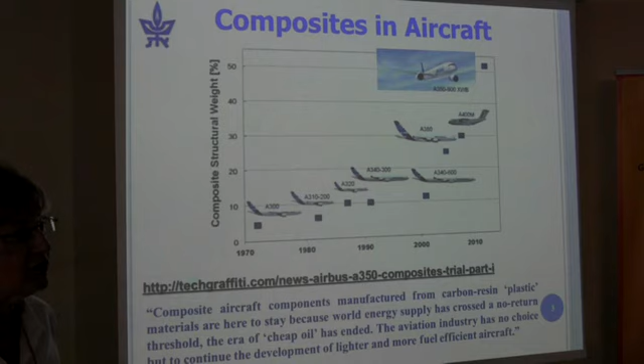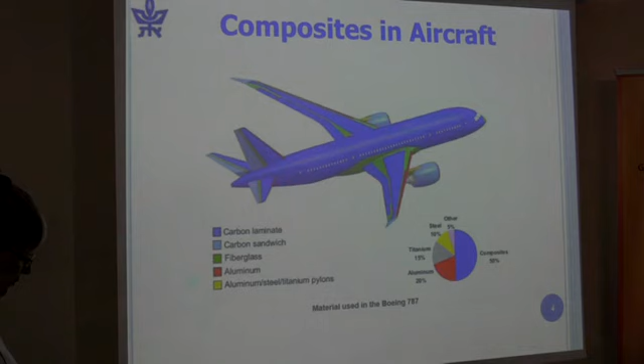Not to forget about Boeing — in many of their planes, and in particular the Dreamliner, the 787, they also have 50% by weight of composites. So we're stuck with composites, and we need to learn as much as we can about them. So we're going to talk about some of the problems in composites.

First, let me explain what a laminate is. We've heard talks about steel and aluminum, and maybe there are people here who don't know a lot about composites, so let me just try to explain it from the beginning. A composite material is composed of more than one component, one constituent. You can take a matrix, which is epoxy, and put in particles of different kinds of material.

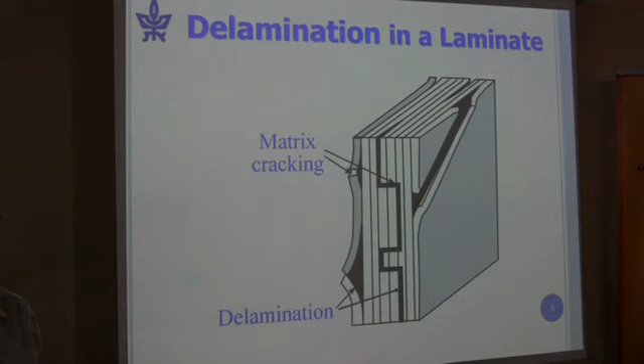Typically what happens is we have different failure modes, and the two most prevalent failure modes in laminate composites are matrix cracking — that is, the fibers, let's say, are not in the 0 degree direction, because that would be very strong — and we get cracking through the matrix, through the epoxy, for example. Or another mode of failure, which is what we're going to speak about, is delamination.

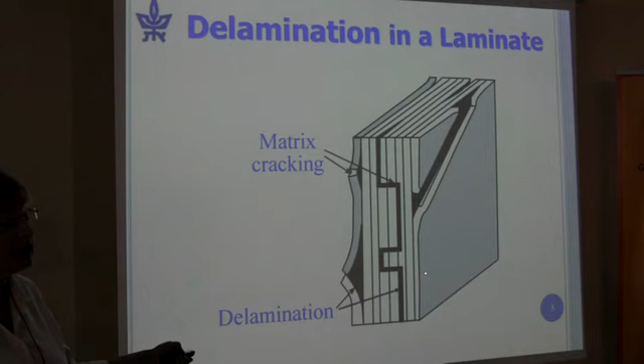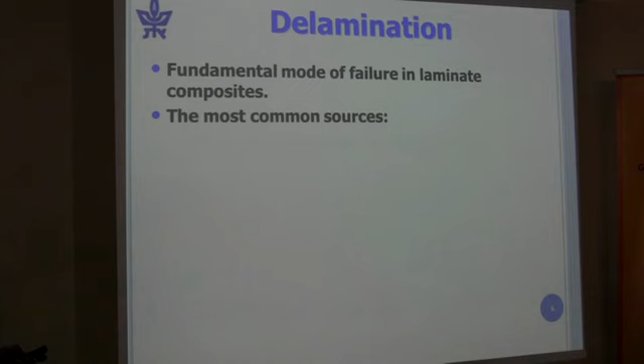We get a separation between the various layers, and that's a very prevalent mode of failure. It's a fundamental mode of failure, and the common sources are material and structural discontinuities, in-service loads, and in particular impact. A plane is flying along, moving along the ground, and a stone hits the wing and impacts it, causing separation of the layers. It's very common, unfortunately. So delaminations tend to occur between plies of different orientations.

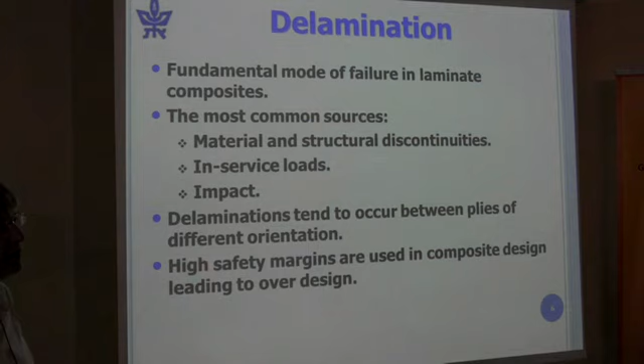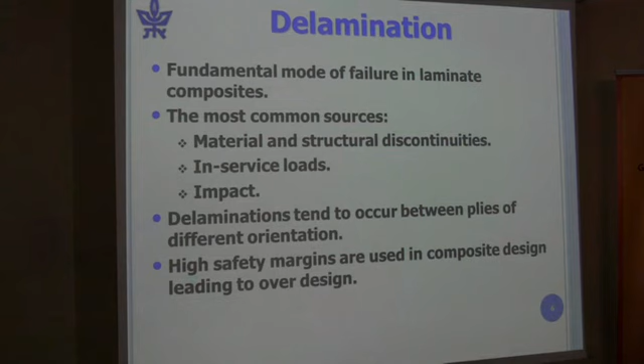What airplane companies do, because they don't use damage tolerance approaches like they do for metals, is use over-design with very high safety factors so they won't obtain failure. But this is a waste—a waste of material, a waste of weight, and it's not fuel efficient. So what we need is to give them accurate fracture toughness values so that we can bring down this over-design.

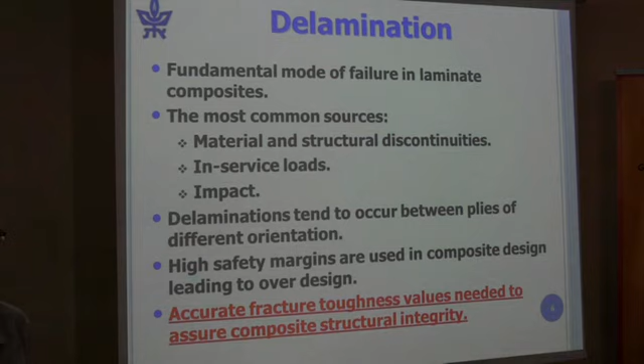One thing I haven't mentioned, which I won't talk about, is that we also need to understand the fatigue properties of these materials. But today I'm only going to talk about fracture toughness.

So to begin with, we'll talk about interface fracture and anisotropic materials. Some of you may wonder why I'm speaking about anisotropic materials—composite materials are anisotropic and inhomogeneous. But what we can do, and what is typically done, is use some sort of homogenization or micromechanical procedure, treating the material as if it's homogeneous, but anisotropic.

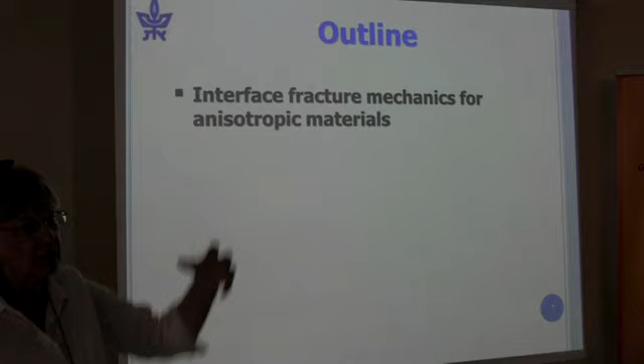So if we think about the ply, which has fibers in the 0 degree direction, it has a high Young's modulus in the direction of the fibers and a very low Young's modulus perpendicular to it. So it's anisotropic.

We're going to consider one interface. We've done more than this, but because of time limitations, we'll look at what's called the 0-90 interface, which I will explain. We carried out tests on Brazilian disc specimens.

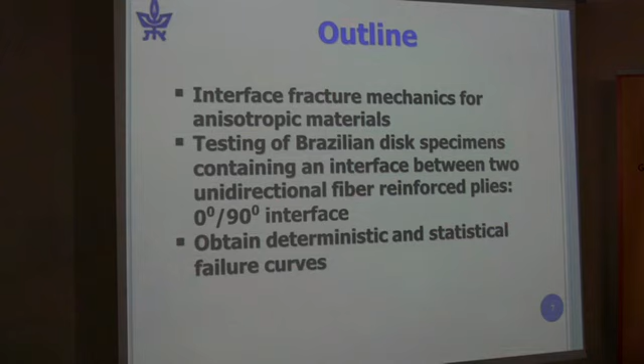So we will look at these tests, and then we need a failure curve. We obtained a deterministic failure curve, and because of the scatter, we felt it would be important to go on and do something statistical, which we'll talk about today. And then we'll come to some conclusions.

So here is the Brazilian disc specimen—here is one example. It's about 40 millimeters in diameter, and this particular one has fibers in the 0 degree direction, fibers coming out at you in the 90 degree direction, and fibers in the 0 degree direction. The composite strip is about 12 millimeters in width.

And this is another layer—here we have, again, 0, 90, 0. We have stiffening composite layers so that the plate that was made wouldn't bend.

When we carry out the analyses, we model it all, and we place these aluminum discs to get a circular specimen, because for handling, if we only tried to load this composite strip, we would have a lot of difficulty.

The load is going through the center of the delamination. Here is the delamination, and by rotating the specimen, we get a full host of mixed modes.

So again, to explain the 0 and 90: the x1 direction is along this layer, as I'm showing you. In the 0 degree layer, the fiber is along x1, x3 is coming out at you, and x2 is perpendicular to the delamination. In this other layer, we have fibers in the 90 degree direction, coming out at us in the x3 direction.

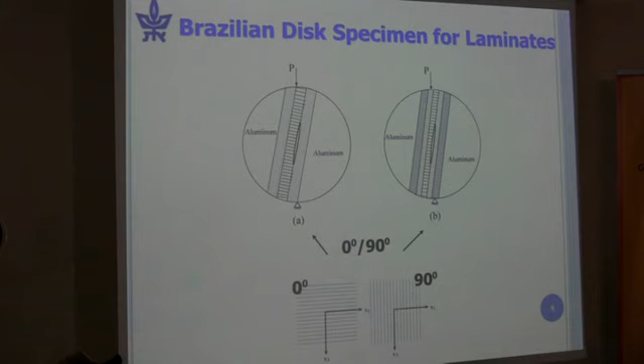So we carried out tests on this type of specimen and this type of specimen. I must say that when we had to carry out tests on this type of specimen, I was very worried, because if we didn't really measure a true fracture property, we would expect different results between this specimen and this specimen. I stayed up a few nights worrying about that, but it all worked out in the end.

All right, for those of you who are not mathematically oriented, you can dream a little bit. I think we could even manage without these slides, but I think it's important to discuss this.

I'm sure everybody here knows that if I have a homogeneous material, the stresses behave as 1 over the square root of the distance from the crack tip.

Now we have 2 materials, and we have 2 anisotropic materials. So first of all, we're looking at the in-plane stresses, alpha and beta, 1 and 2. We have different functions, and these functions differ depending on whether we have material in the upper half space or material in the lower half space, 1, 1, and 2. Now here is our 1 over the square root of r.

1 over the square root of r singularity. And then we have this other r to the I epsilon, which when people look at it, they say, oh my God, and then they close their minds.

Don't close your minds. All this does, the I is square root of -1, and epsilon is a very small parameter that depends on the mechanical properties of the material. So what it does is, as the stresses go up to infinity, 1 over the square root of r, they start to oscillate very rapidly. And as long as that's relegated to a very small zone, we can use these ideas. One has to examine that, and as long as that occurs, we're okay.

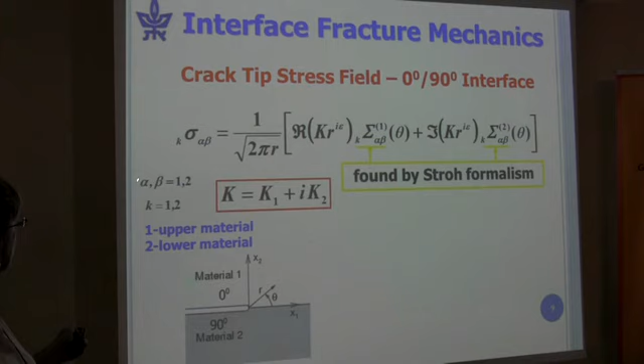Now these functions, which are nice functions, they're bounded functions of theta. We have one for mode 1, one for mode 2. They have to do with whether we're talking about sigma 1,1 or sigma 1,2, and it depends whether upper or lower. We have analytic expressions for these, they're not numerical, and we get them from the Stroh formalism. As I said, epsilon is called the oscillatory parameter, it's causing the stresses to oscillate.

And then we can do the same thing for the out-of-plane. It turns out for 0-90, the out-of-plane behavior is the usual 1 over square root of r. We have K3, the mode 3 stress intensity factor, and we obtain this expression again from the Stroh formalism. So we have an analytic expression for the first term of the asymptotic solution in the neighborhood of the delamination front.

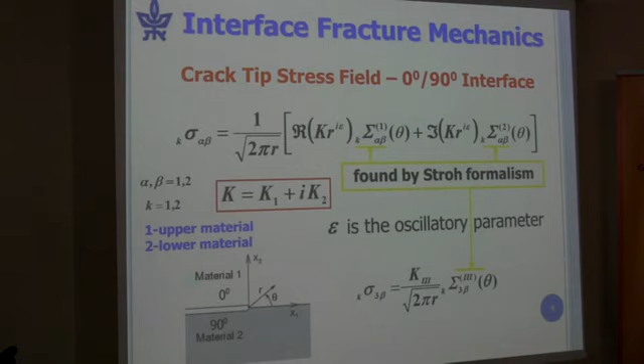And so because K has such problematic units, one does something to normalize them and multiplies by a length scale to the I epsilon, and this K hat has normal stress intensity factor units, force over length to the 3/2. And the question is how to choose L hat, and that comes out of the experiments.

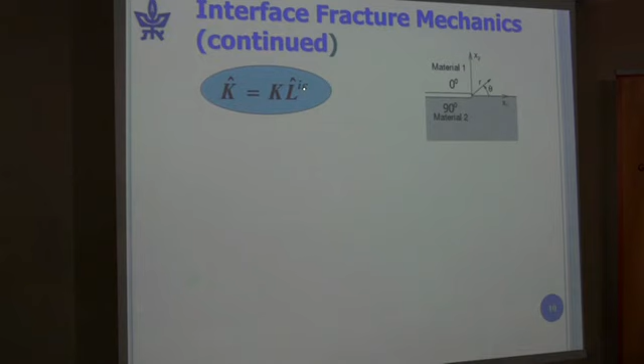So in addition, we can define two phase angles. This is basically K2 to K1. This is K2 hat to K1 hat, so it's a mode mixity. And actually for our 0-90, we're not going to look at this other phase angle, which is a relation between mode 3 and the in-plane modes. And these functions, H1 and H2, are Young's modulus type quantities.

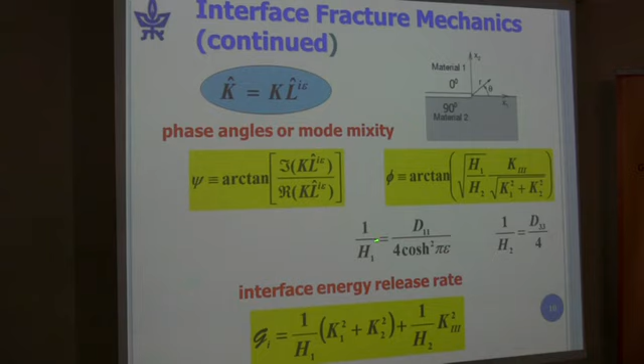There's somebody who is familiar with the stress intensity, with the relation between G, the energy release rate, and K. You have 1 over E or 1 over E bar generally in homogeneous materials. So here we have this H1 and H2, and both epsilon and these D quantities depend on mechanical properties. So you can think of H1 as being Young's modulus, if it makes it simpler. And then we have an expression for the energy, the interface energy release rate, and it's very similar for homogeneous materials.

So now we needed to analyze our test specimens. We carried out a test, we obtained the applied load, we know the geometry, we know the crack length, the delamination length when it fractures. So we used finite elements and a conservative M integral, and we only did this in 2 dimensions, and we examined the implications of that, and it's okay. So we obtained K1 for applied load for force and K2 for force. One mustn't forget that when you have composite materials, you're curing them.

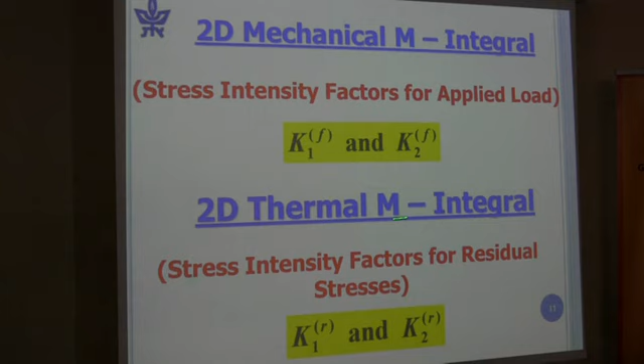These were cured at 177 degrees Celsius. So you also have residual stresses, and we obtained K1 and K2 for residual stresses, also from an M integral.

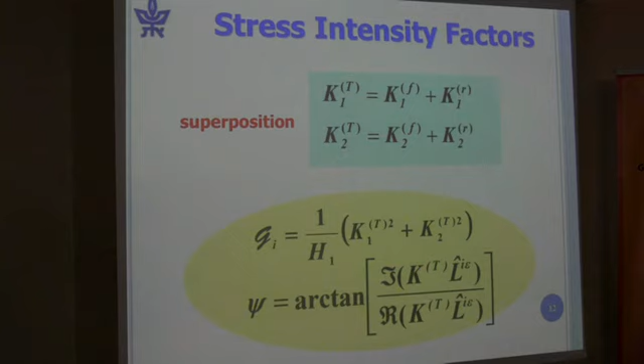Now we take our Ks, and we have linear elasticity. We don't have plasticity in this case, it's very, very small since these materials are brittle. We superpose the K1s from applied load and from residual stresses. The K2 is superposed. We then obtain G from the K totals, and this is basically K2 hat divided by K1 hat. And here are our specimens.

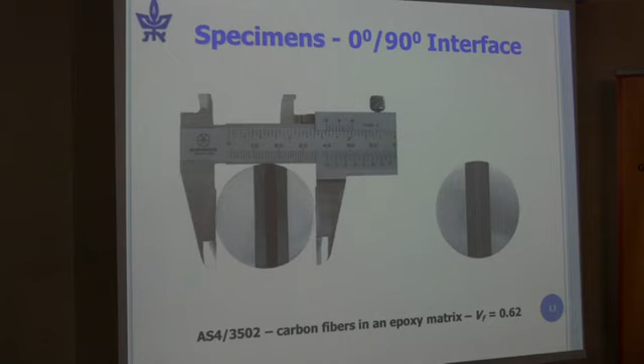As I said, they're 40 millimeters, and you can see the relative sizes, 4 millimeters each, and here they're 0.5 millimeter each, plus the stiffening layers. The material used was AS4, which is a carbon fiber in 3502 epoxy matrix, and we had a volume fraction of 62% of fibers. And here is our loading frame.

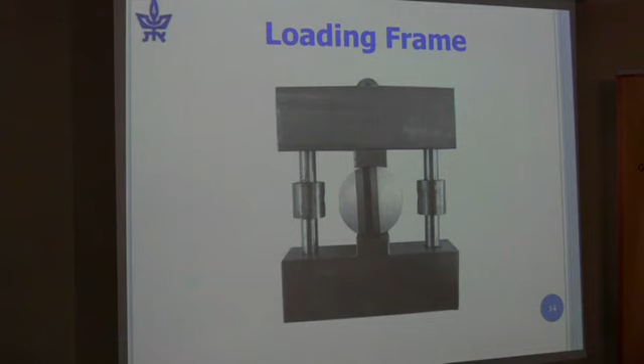So as we rotate the specimen and we load in this direction, we get a whole host of mixed modes. So it's a very convenient specimen.

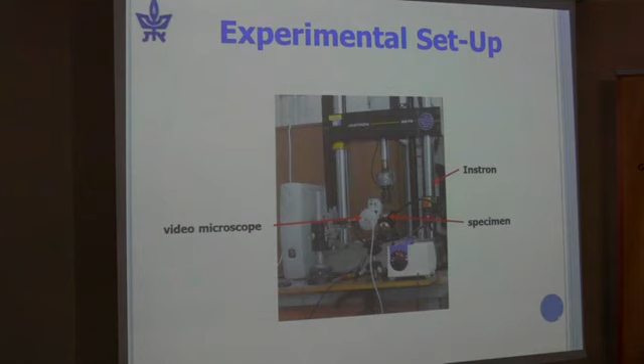And here is our experimental setup. You see our Instron machine. The specimen, I don't think you can see, is in there. The upper grip is not touching yet the specimen. And we do everything with a video microscope so that afterwards we can look at the films again and again and see what's happening.

Okay, what's left? What's left is to do the tests and to have a failure criterion.

So you can take the expression for G, which is... thank you.

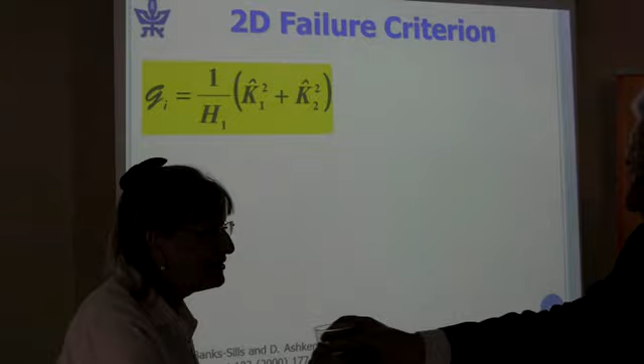Thank you. You can take the expression for G and you can rewrite it in terms of these hat quantities. You have to know mathematically why it just comes out to, you're just putting the hat quantities on it. It's trivial if you do it. Recall that K hat is a normalized K, so it has the normal units of stress intensity factor. H is just a function of mechanical properties. And you can manipulate this expression so that you write it in this way.

So this is the failure criterion. You manipulate this, and I'll explain what psi is, I'll remind you what psi is, and what G1C is. We carry out, let's say, 25 different experiments, and we analyze them, and we obtain a value for K1 hat. We square it, we divide by H1, and then we take the average for all of them. So this is an average G1C value, and psi is just the mode mixity, K2 hat to K1 hat, the arctan. So this is our failure criterion, and here is a graph of the failure criterion.

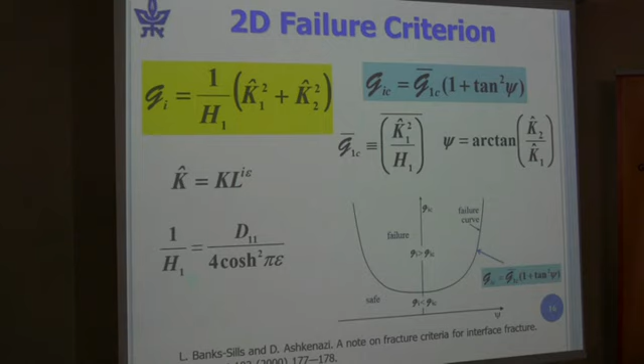So you calculate your psi for the L that you use to obtain this curve. You calculate your GI, and if you're above here, that means that you're going to expect failure. And if you're below when you calculate it, that means that you're in a safe zone. So all values below this curve are safe, and all values above this curve indicate failure. And if, let's say, you do something like this for an airplane that you're designing, you say, I'm going to have failure, so I better redesign, I better make the part thicker, I better change the geometry in this place in order to be below the curve.

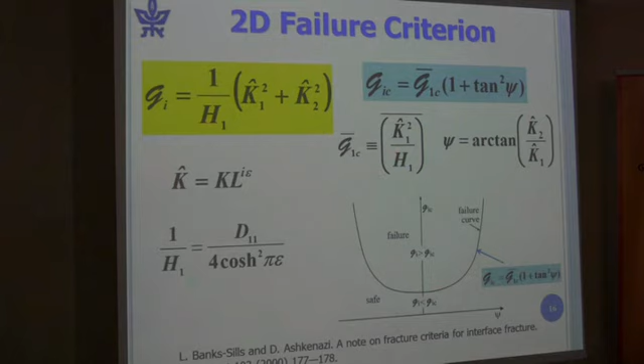What is the problem with this? The problem with this is statistically, we have points below the curve which fractured in our tests. We have test points below the curve where it should be safe. And that drove us to do a statistical analysis. So to say that I'll give you a new curve, which will be more conservative, it'll be lower, but then I'll only have a certain percentage of probability of failure in that safe zone. So that's what we did.

And so we used a standard normal distribution. And this is the probability density, this axis. And you can calculate the probability P to a certain standard normal variate, ZP.

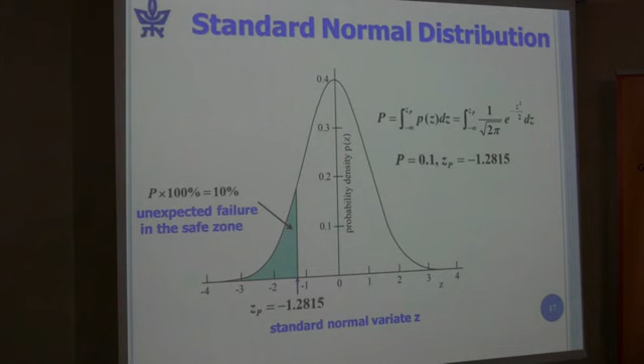So if I choose ZP to be this number, then I'm talking about a probability of failure of 10%. That is, any point in this region has a 10% probability that there'll be unexpected failure in what we call the safe zone. So we can use these ideas to lower our G1C average quantity.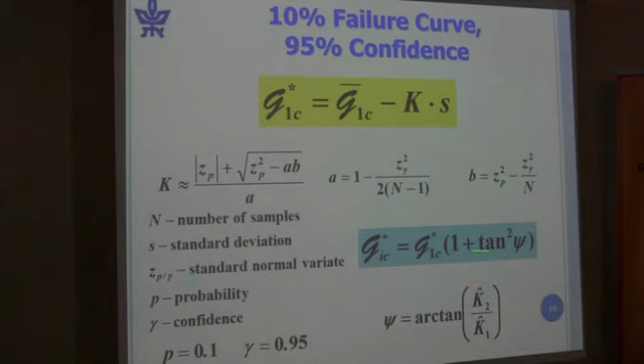So we now have a new curve in which we've lowered the G1C value to G1C star, and we plot this curve. This is the deterministic curve, and this is the statistical curve where we've lowered the G1C value. So if we chose 10%, there's only a 10% probability that we have a failure in the safe zone, with a 95% confidence interval.

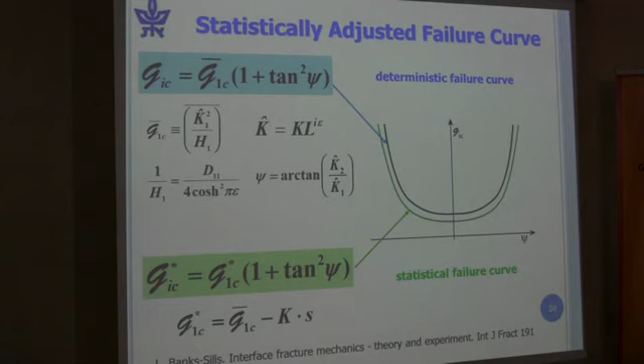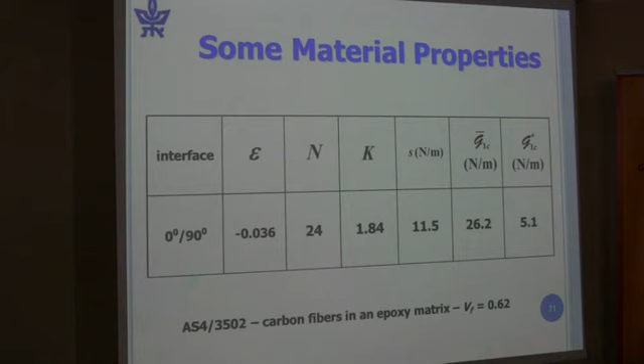So we're considering the 0-90 interface, and you'll recall the oscillating parameter epsilon, which is very, very small. We had 24 tests. We calculated G1C bar to be 26.2 newtons per meter. The standard deviation is 11.5, which is rather high. And so with this K value from the statistics, we have a new value, G1C star, which is much lower. But now we only have a 10% possibility of failure in the safe zone.

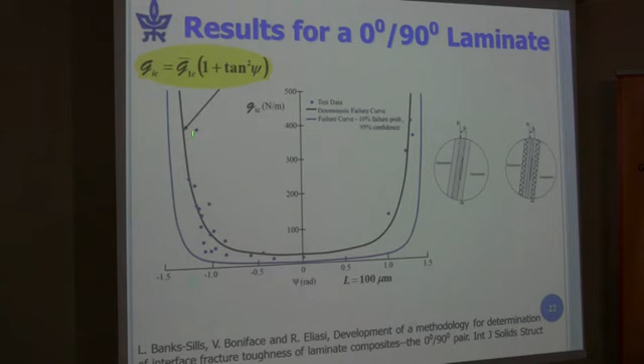And let me just say that looking at this curve, we have a lot of confidence in it. The reason we have confidence is these points, which are far out — and this is far out in mode 2 — agree very well with the curve. It's not like this point is not that good, but it certainly isn't over here, it's near the curve. And this was our G1C bar, which was 26.2.

And then for our new failure curve, which has a 10% probability of failure below it, this is the curve in which G1C star is 5.1 newtons per meter.

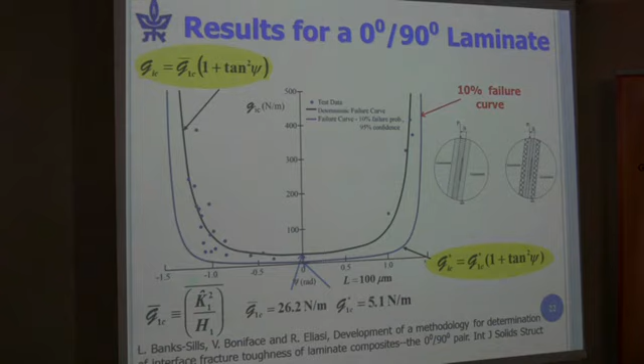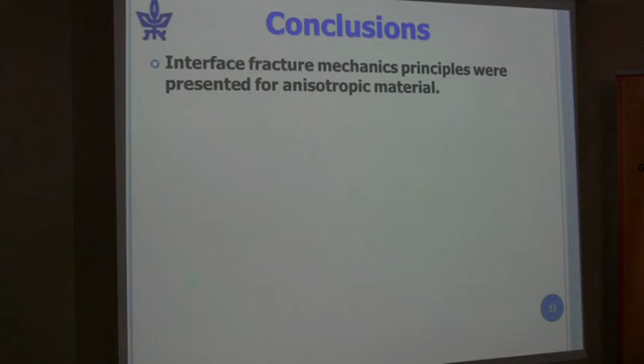So we will conclude that we have looked at the interface fracture mechanics principles for anisotropic material. We carried out tests on Brazilian disc specimens. We did it for the 0-90 interface, and that's what I presented to you. We also did it for the plus 45, minus 45 degree interface, and this turns out to be a stronger interface. The G1C value is about 90 newtons per meter.

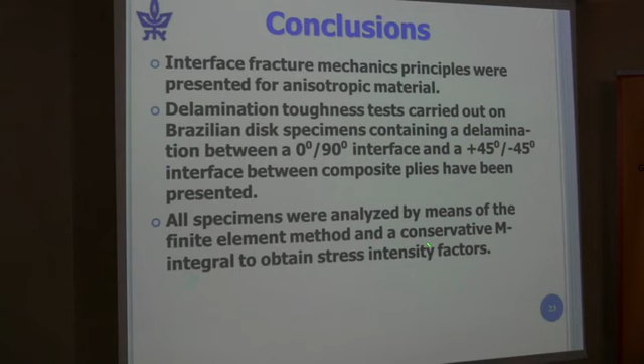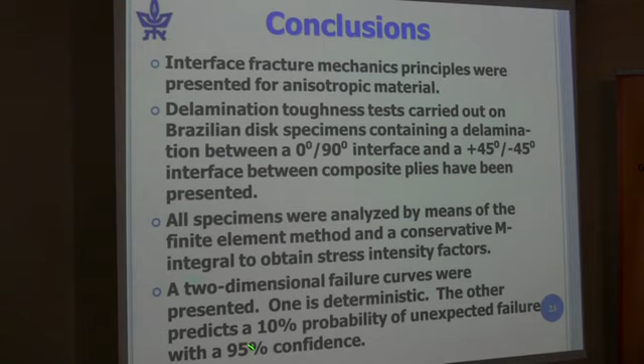All specimens were analyzed by means of the finite element method, which I didn't present to you, and conservative M integrals, which I also didn't present, I just mentioned them. And we obtained two failure curves: one is a deterministic failure curve, and the other has a 10% probability of unexpected failure. We could do it with any percentage that a company, let's say an airplane company, would like, with a 95% confidence. And now we're working on different layups.

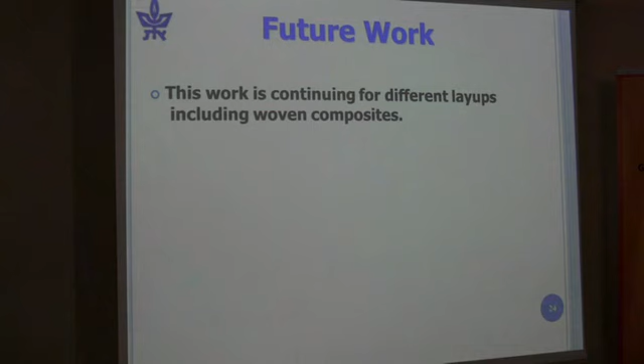We're working on woven composites. We've done DCB specimen testing using woven composites — someone showed us DCB testing here yesterday, I think — and so we're getting G1C values. We're also carrying out fatigue delamination propagation tests. We've done this also with some woven composites with DCB.

And we're going to be starting to work on mode 2 and mixed mode in these directions, because you need a complete picture — not only of the fracture toughness, you also need the fatigue parameters — in order to do some sort of a damage tolerance paradigm for, let's say, an airplane.